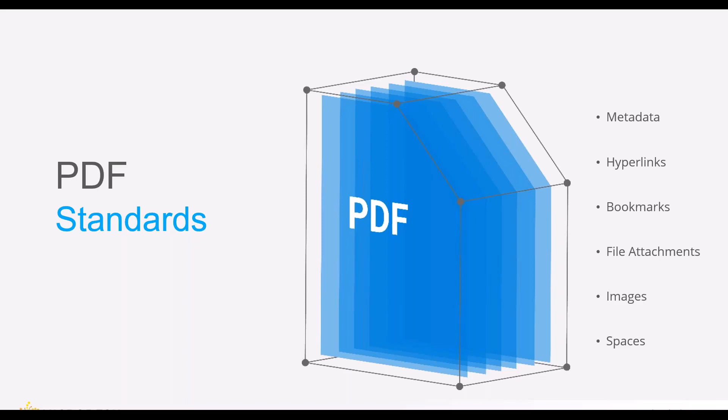Now, when we talk about PDF files, we often include metadata, hyperlinks, bookmarks, file attachments, images, and spaces, often without realizing their effects on the PDF file. The benefit of using Bluebeam Revu as your PDF editor is that you can harness and control all of this data.

So we'll go ahead and jump into a demo of Revu to show you how this data is consumed and used. During our demonstration, you can expect to see tools used for marking up PDFs, how to customize the tool chest, the power of your markups list, how to create an interactive form, and how to work in the cloud with Bluebeam Studio.

All right, let's switch over to Bluebeam.

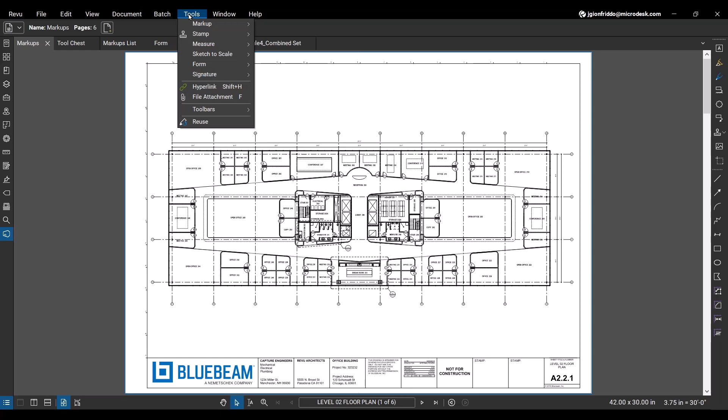So what you see in front of you is Bluebeam Revu. Right now I'm in a standard profile mode. And if I wanted to do some markups, I have a few locations where I can obtain the markup tools. The first one I'll show you is here along our ribbon. We have a tools panel that we can open up of the markups, and we can see a list of markup options available to us.

So let's go ahead and start using some of these. I'll use the line command, and that is put in with two clicks. We'll next look at a text box.

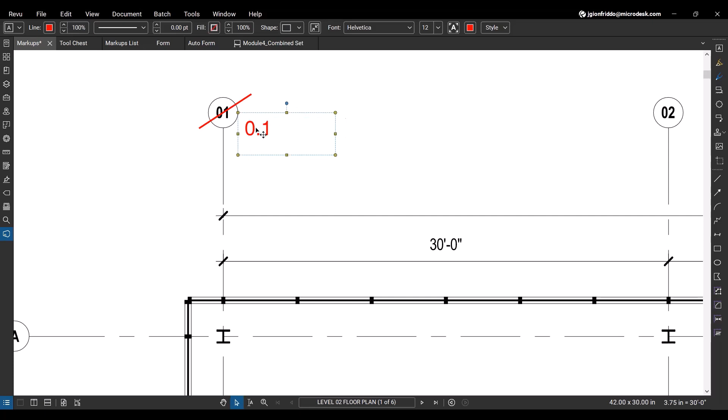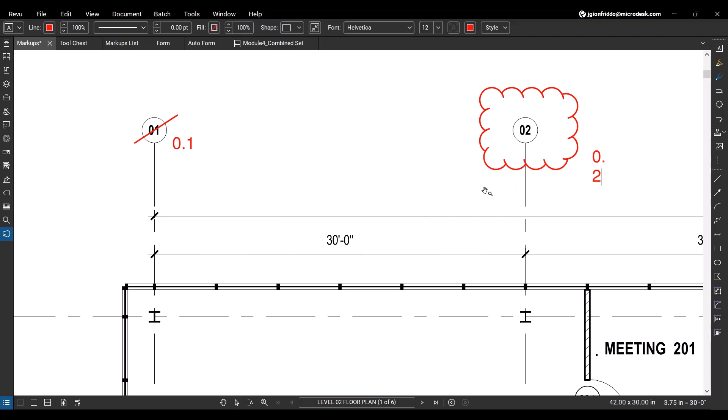There's another way we could accomplish this type of markup, and that would be with a cloud, and maybe a similar text box. In that case, the box wasn't quite big enough, but we can just expand it as needed.

A third way for a similar option would be our Cloud Plus tool. So you'll see here, in one tool, I can build the cloud, put the leader, and put in the new information.

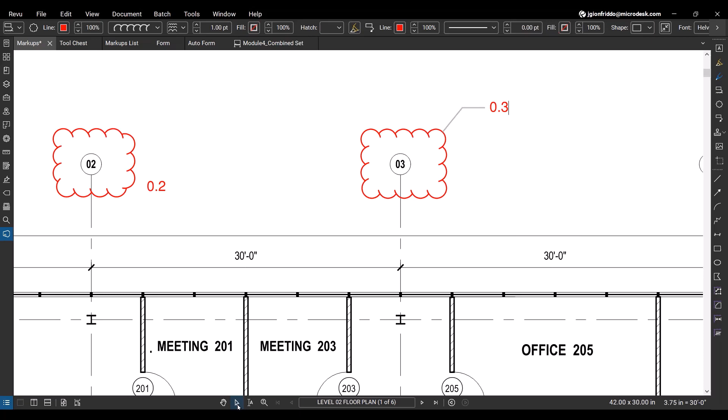Other markup types that we have include a highlighter, and this can be used in two different ways. One can highlight in free space. The other, if you move near text, you'll see the icon change, and you can highlight text directly.

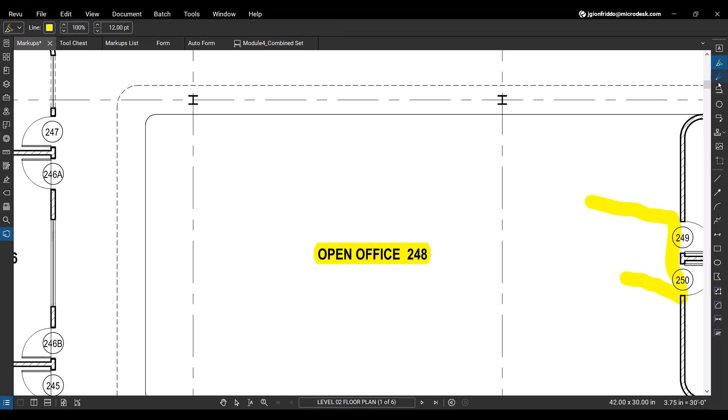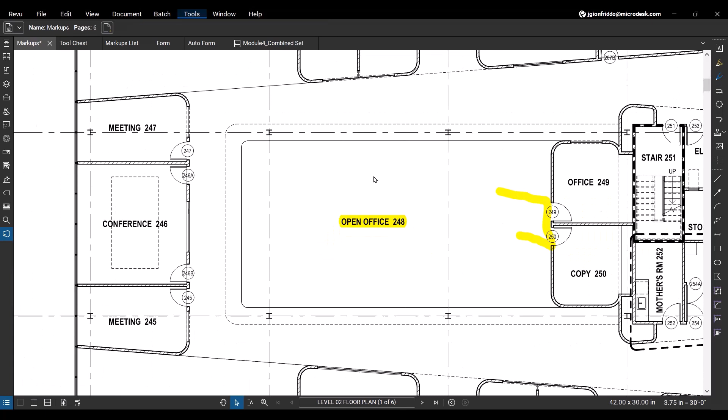In addition to the tools on the ribbon, we also have tools located along the right-hand panel, and any of these can be used as well. Also, when you're on the tools markup area, you can see the shortcuts available for each of the markup commands. So if I wanted to draw an arrow, I can use the A shortcut. Let me get out of the command, type A on my keyboard, and draw an arrow. So that's three of the ways.

There is a fourth way, which is what we call our tool chest. It lives here on the left panel, and by selecting that, it'll open up and we can grab markup tools out of here as well.

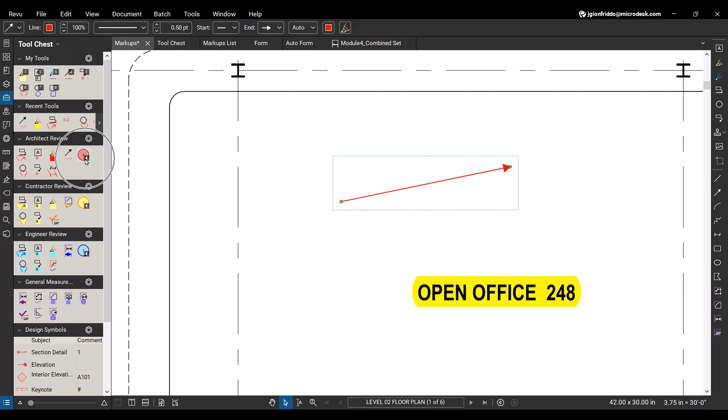This one's a nice one. This is actually a counting device. So if we select that, we can move around and you'll see this one will count for us.

And we have some AEC style symbols built in as well. So if you needed to cut a section or show a detail, and then these can be edited as needed.

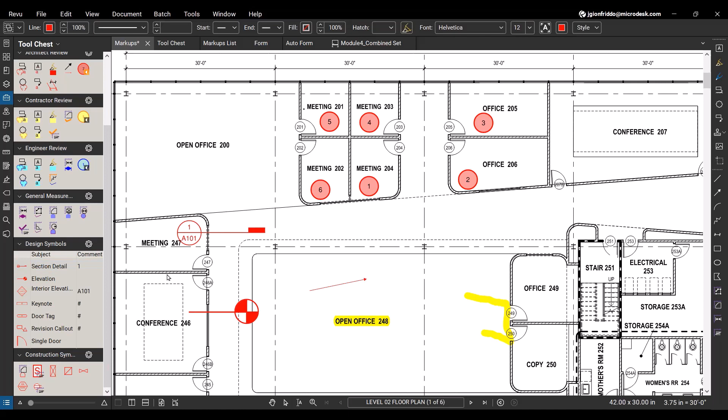All right, so we've been using the out-of-the-box default settings. If we select any of these markups, you'll see a properties ribbon along the top, and this is where we can adjust any of the settings that you see here, whether it's the color, the line type, the font, the fill, all of that can be done here.

I'll just quickly change one of the line types. You can see there's the leader, and then the font type is a little bit further down. So each piece of it can be controlled separately for you.

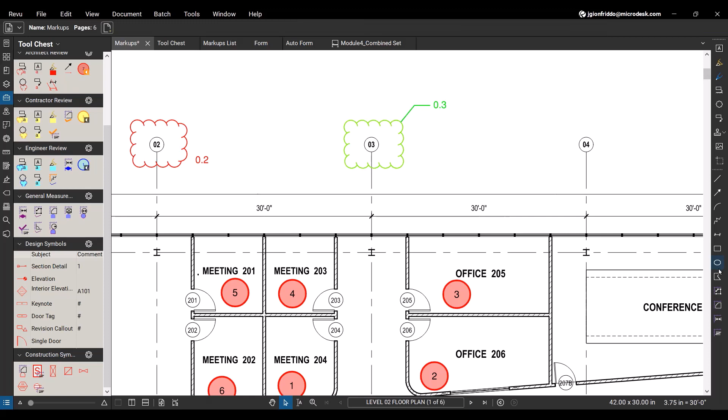And then this can be, with a right click, set to be the default. So the next time I go to my Cloud Plus command, you'll see my green options have been remembered.

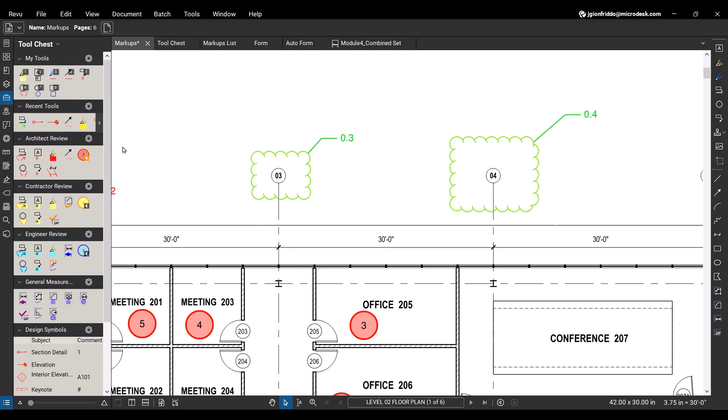So all of these tools are completely customizable to your firm and to your standards, and can be adopted across the whole firm. You'll notice some of the tools I've been working on are popping up into my tool chest under my recent tools.

And once that happens, I can select these, move them into a new tool chest, maybe something like My Tools, and now this will become a permanent tool that I can use anytime I'm in the program. Recent tools will reset each time you close Bluebeam, so if you want something from this to be permanent, you need to move it to a different tool set.

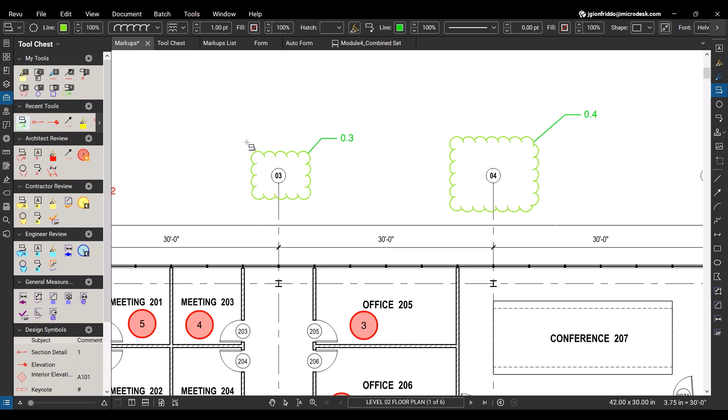Also notice these little numbers. These are shortcuts as well. So now number 9 will draw this exact style of Cloud Plus command. If I escape out of there, hit 9 on my keyboard, you can see I'm back to that command again.

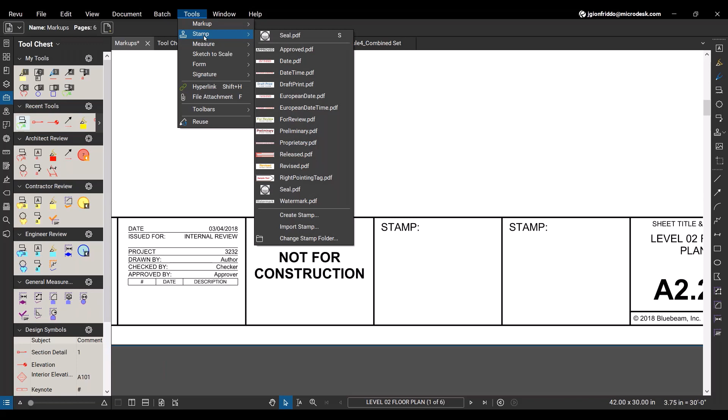All right, the next markup tool I'd like to show you guys is our stamp tool. So when it's time to stamp your drawings, we can customize these for your firm. This one is just the out-of-the-box one. You'll see here we can place the stamp.

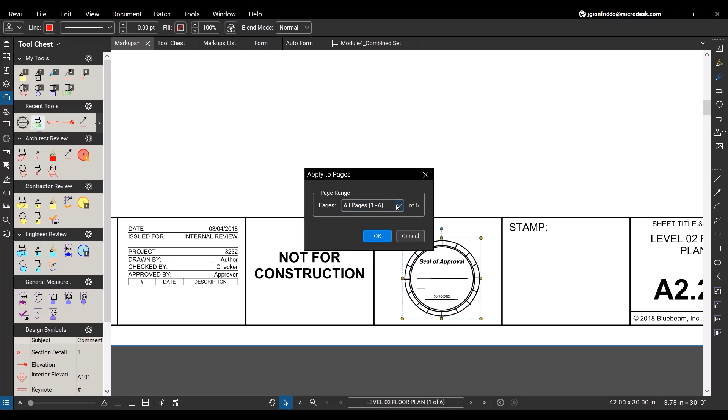Instead of going page by page and putting it on all of these different pages, what we can do is select it, right-click, and tell it we want to apply to pages. In this case, I'll just apply to all the pages, but you can set this up however you need to. We'll say OK, and it'll apply those stamps to all of our pages. So very quickly, it's very quick for you to be able to stamp your plan sets.

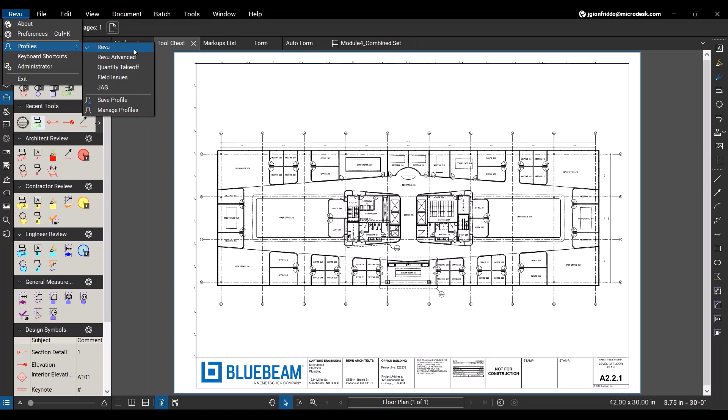Okay, moving on to the next one, tool chest. We started looking at this already, but here we'll look at a little bit more of the pre-baked in customization. So if you go to your Revu button and under profiles, you'll see a few profiles that are built in. The Revu is the standard one. Revu advanced will look like this, similar tools, just kind of shown in a little different way. And anytime you need to use one, you just click on it and you can place that.

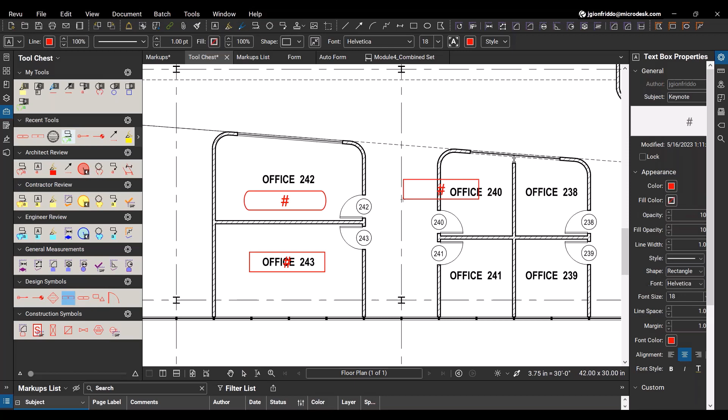You may want to place multiple tools of the same. And to do that, you can go to tools and turn on reuse. And now as you place a tool, you can keep placing it. So I don't have to keep launching the command each time.

But the real power of the tool chest is the fact that you can customize it, you can export it, and you can import it. So what this allows is for your company to have a standard that everybody abides by. You can create the tools that would be part of your company's standard tools.

You can go to one of these gear buttons and export those tools out. And then any other user in the firm can go to the tool chest button, manage tool sets, and import those same tools into their Bluebeam, allowing everybody to have a standardized set of markup tools.

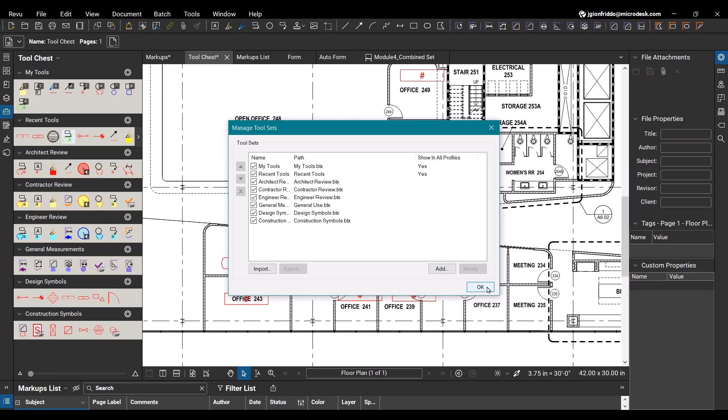There are also ones available on the internet from Bluebeam and from other places where you can download them, or like I said, create your own package. And there are a few that are inside of the program as well. So if you wanted to do quantity takeoffs, this would be for measuring distances, areas, or getting counts off of stuff. We have a profile for that, and the general measurements and some counting tools, sequencing ones that you can use.

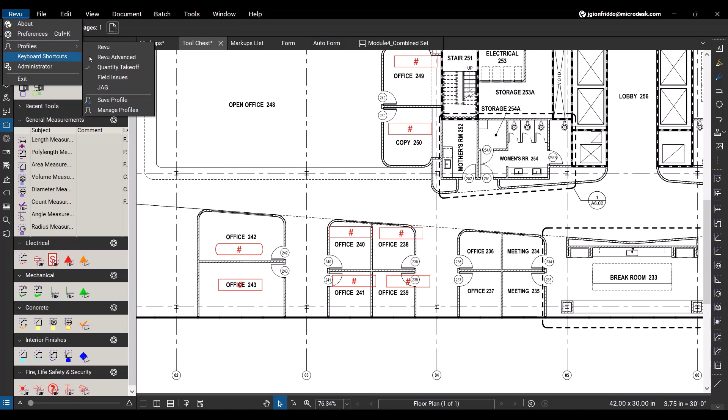Also, we have a profile for field issues. So if you're trying to do a punch list of field issues for your project closeout, they have those tools predefined in here as well. And you can see they're already set up with their comments. So in this case, it's for wrong light, or this one would be a missing light. And we can go ahead and grab these and place them.

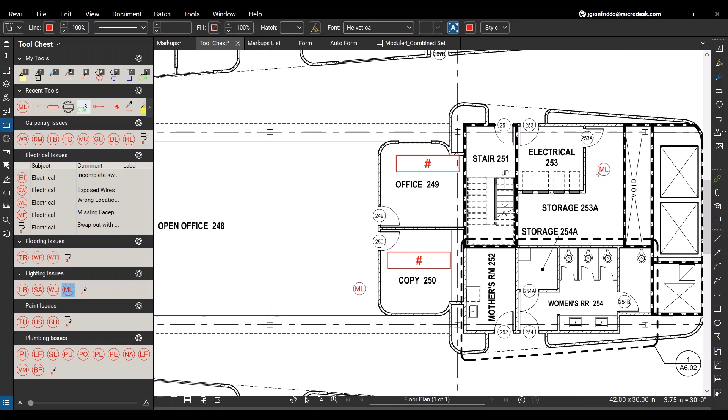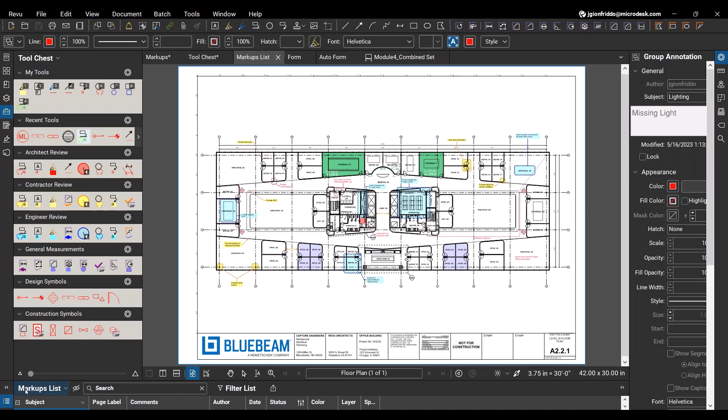Okay, I'm going to switch files here. Now, as that was going on, kind of behind the scenes, if you will, Revu was building a list of all of your markups for you. And that lives down here at the bottom of your screen. And if we slide this up, we'll see our markups list.

So the markups list can be sorted. You can filter it. You can change which columns are shown. And you can export this as a report. So when we talked about the punch list for field issues, that would be a nice report to be able to export out. So let's go ahead and look at some of those options.

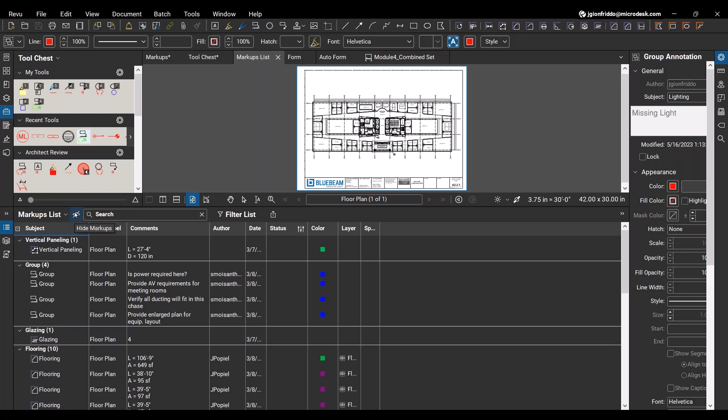First off, if you wanted to print a clean PDF without any markups, we have a single button for that. We can hide the markups and print this now, and you won't have any of your markups on your plot set. If you would like to sort this, you can click on any of these columns and sort by their statuses, or sort by the author, or sort by the comment.

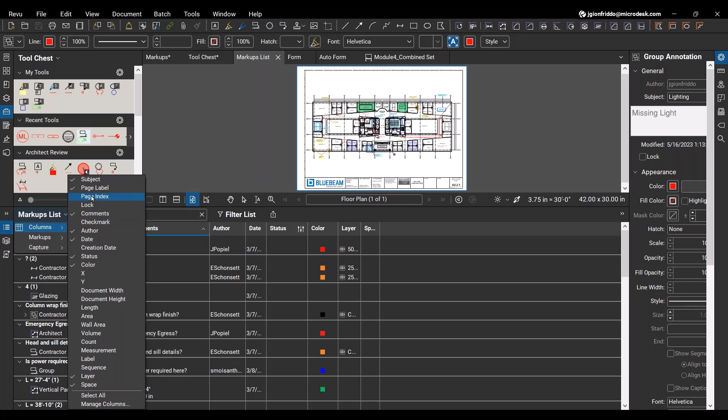One I use quite a bit will be a page index, which is like the page number. To get that extra column, I would click under markups list, columns, and I would turn on the page index. And now if we sort by that, this is sorting markups by which page they're on. So there's ones on one page. This is a one-page document, but that would work if it was multi-pages.

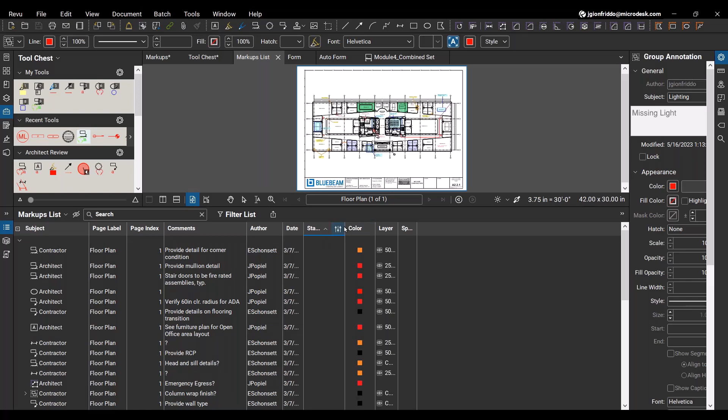Another thing you can do with the markups list is you can control the statuses, and that's what this says. I know it's kind of crunched in. Let me slide that over. There we go. This is the status of the markup. And what we can do with that is we can right-click on a markup and set the status.

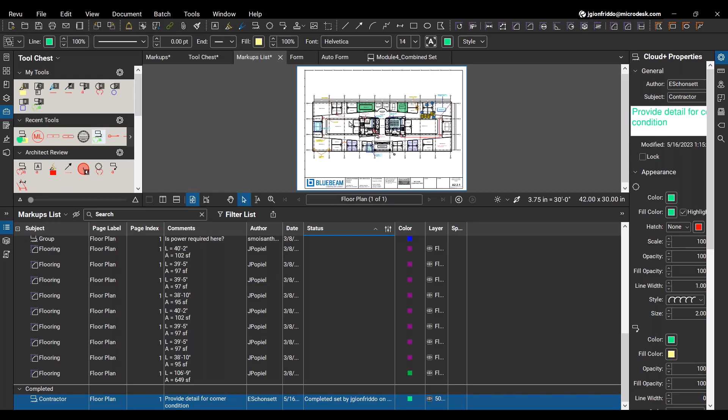And maybe if I was the drafter making the correction inside of Revit, I would mark it as completed. And you can see we've set this up to actually edit the color, and it makes it a green color, showing it's completed. We could do that right in the plan as well. So let me zoom in here. We can select one, right click, set status to completed.

And now as somebody, maybe the engineer who did the original markups, has a chance to review it, they would be able to go through, right click, set status, reviewed as accepted. And in this case, I've set that to gray it out. So as we work through digitally, we're able to keep track of what's been done, who did it.

If we expand this out, it'll give you even a little more detail. It says who made the status change at what time, and what the status change was. And so we can see who was working on what details and what markups and who was approving them and which ones may still need to have some work done to them.

So this works out really well when you're collaborating with multiple team members and you don't want to break the work apart by page or something. You can just look at the statuses and see which work needs to still be done and which work has been done.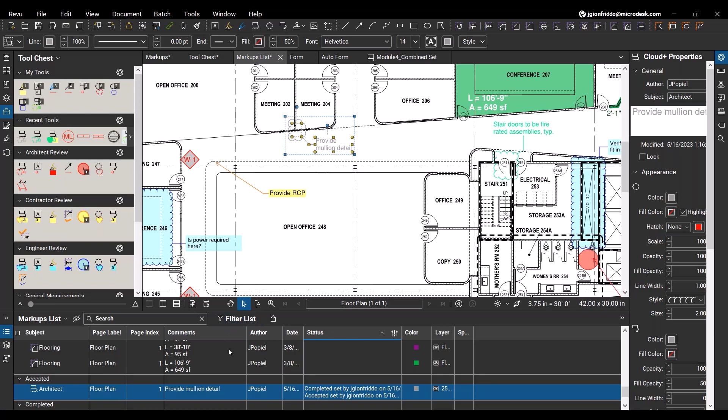I talked a little bit about filtering the list. If we click on the filter, let me make the list a little bigger, it will allow us to click in the headers and filter the list. So maybe we wanted to see all the markups by a certain author, and now that's all we're going to see here. And there are all of these headers that have a gray and orange box. You can click in there and edit those. Let's clear the filters and go back to normal.

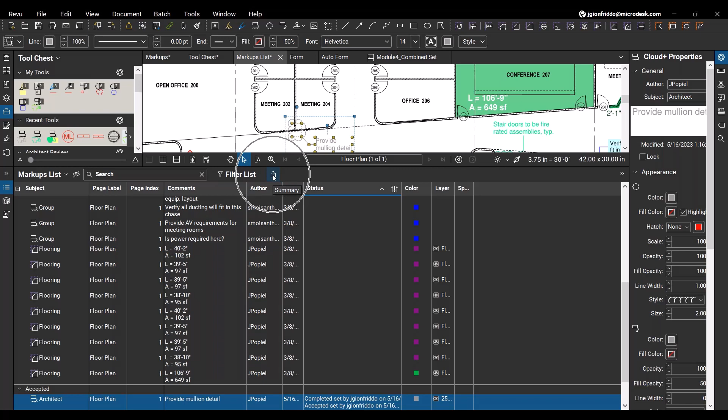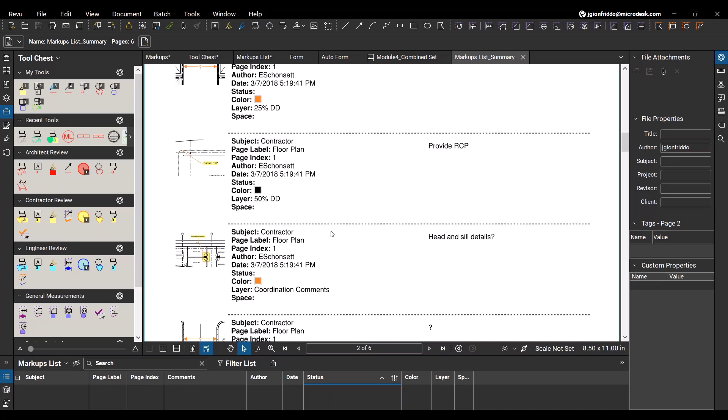All right, and I also mentioned that we can export this as a report, and we do that here through the Share Summary button. And in my case, I'll just make a PDF summary. I'll keep the defaults, but there are lots of settings that you can edit if you need to. And in this case, it's printing out a report of each of the markups, and it'll show their status and kind of give locations of them. And this will be really helpful if you're using this as a punch list for the field issues, like we mentioned.

All right, moving on from markups, let's talk a little bit about the automation within Revu. So what we have here is a PDF that if you were going to try to fill this in, you would need to go to Tools, Markup, Text Box, and draw a text box here and fill in your information and probably recolor this to be black so that it matched and all of those good things.

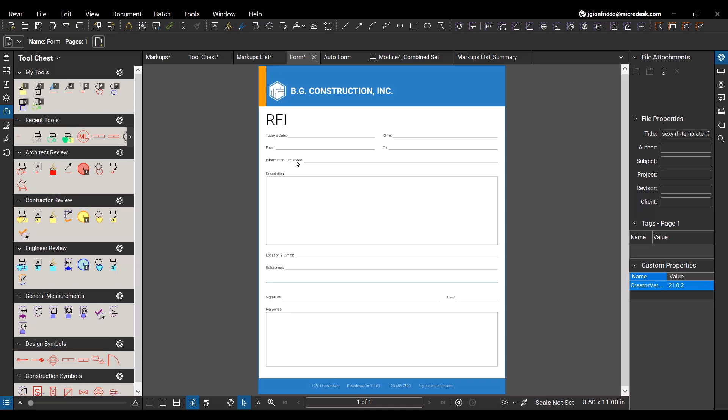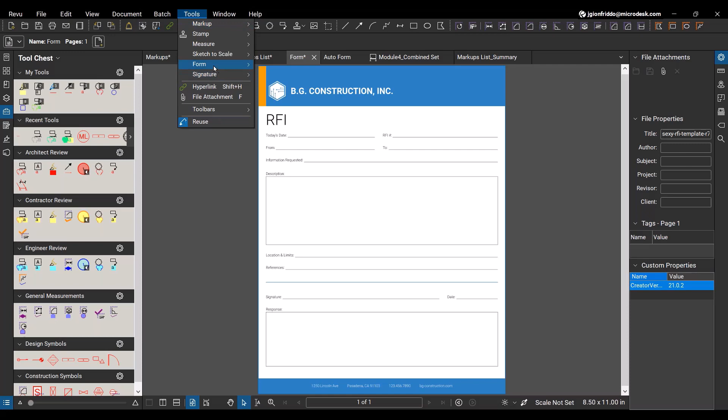And if you had this form and you were going to be filling it out multiple times, it would be a lot more handy if these cells were smart and you could tab through this and type as you were tabbing. And Revu allows that to happen. So if we go to our tools, our forms, we can say we want to automatically create form fields, and this will turn this form into an interactive form for us. And it really is that simple. It's able to understand the difference between a date cell versus a non-date cell.

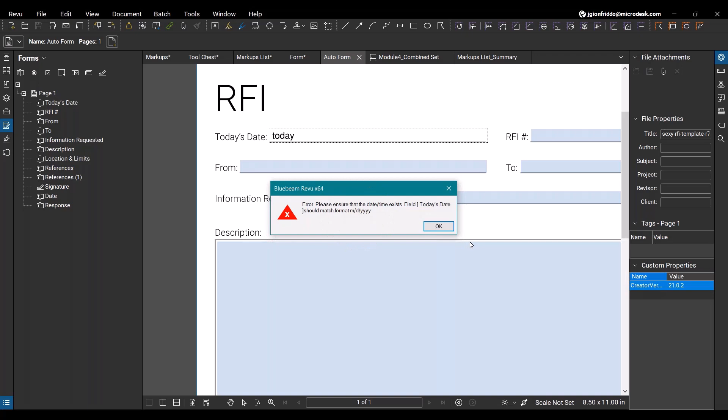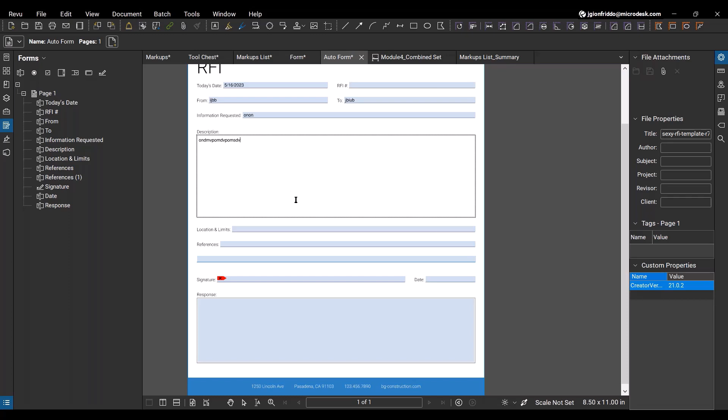I'm going to move over to this one where I've already saved the same form. And you can see if I try to go here into my date cell and not put a date, it'll actually tell me, sorry, this is a cell that needs a date. So that's nice. And the rest of these, I believe, are set up as text cells other than the other date cell down here, as well as this signature cell. So you can see how I can tab through the form, filling in stuff as I go. And then this could be saved out as a copy of this form. Maybe it's my version of my RFI.

We'll talk a little bit more about the different flavors of Revu, and they have made an adjustment as to where this auto form creation lives now, in a good way.

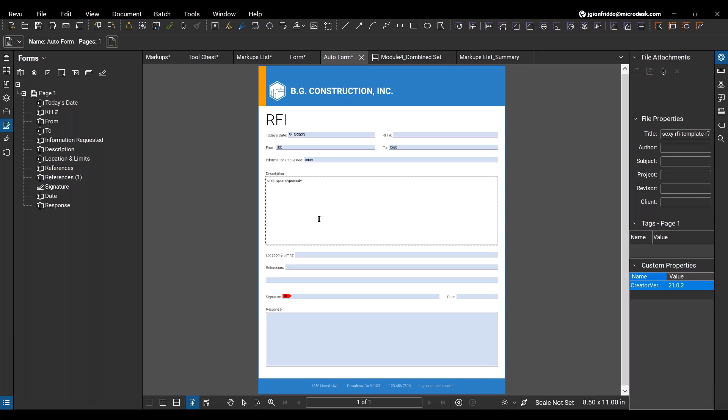All right, so we'll now start talking a little bit about the cloud offerings from Bluebeam. So what you're seeing here is what we call a Studio Session. There's also a cloud version called Studio Projects. And what we have for you, I have a coworker who's going to log into the file, and he's already been invited to this file. And once he logs in, we're going to see his markups happening in real time.

While we're waiting for that, let me just explain a little bit between what Sessions and Studio Projects have. Studio Sessions is sort of the live, real-time, work on it together at the same time, where a Studio Project is sort of like a Dropbox location, sort of like a cloud server location. So you're not going to work with multiple team members live on projects, but you will be able to do that inside of Sessions.

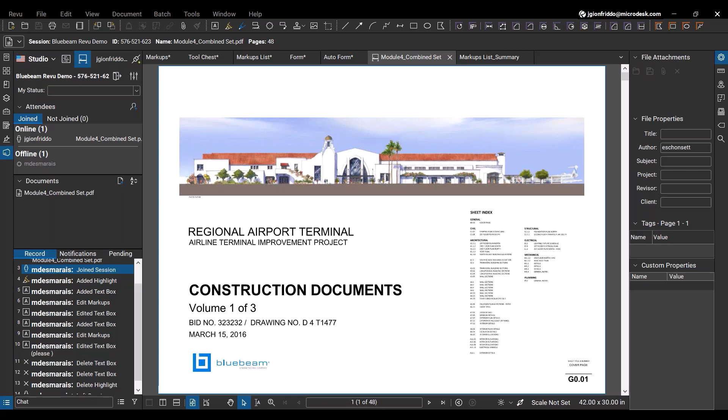All right, even with those technical difficulties at the end there, I hope everyone enjoyed seeing Revu in action. We know in a post-COVID world, the pressure for digital transformation has been amplified, and you need to respond with flexibility, control, and innovation. Since working remotely is not unique in today's world, efficient self-service options are crucial. You also need data-driven business practices that are secure, especially with increasing information security standards.

And with regards to cost pressures, there's a scarcity of skilled labor, changing demographics, and changing project logistics to deal with. As a result, technology and solution providers need to be more innovative to overcome these challenges and provide a competitive advantage to their customers. Bluebeam is doing this. How? By transitioning their base offering into 3 new plans.

For a high-level overview, starting with Revu Basics, you'll have essential tools for marking up and managing your AECO office and project documents. With Revu Core, you'll have more tools for managing and collaborating on small and mid-sized AECO projects. Core includes all features from Revu Basics, plus real-time collaboration via Studio directly within Revu. That little part at the end, which I wasn't able to show.